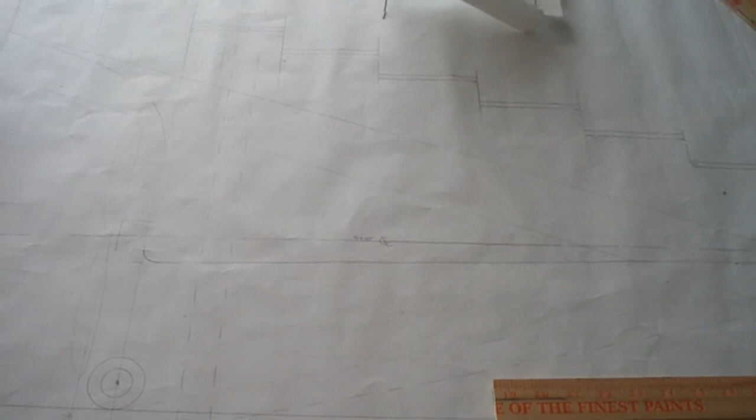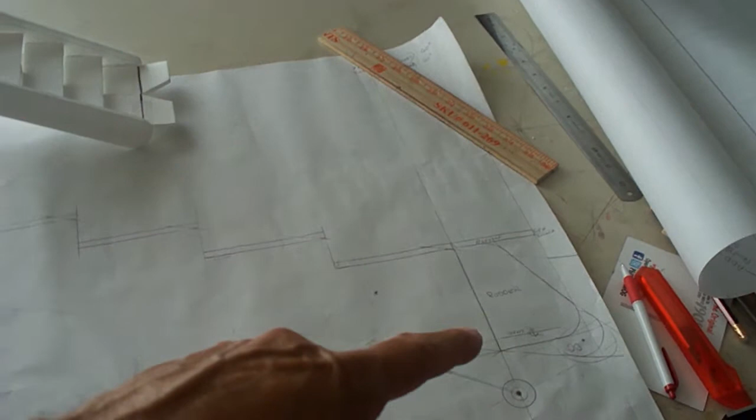Okay, I drew up a set of plans. I don't know if you can see this in the video or not, but here's the top. It comes down and around, down, and then I've got my landing gear, and it goes all the way back. I've got a rudder on it. Might be able to see that. And then I've got the cutouts for the slats all the way to the top. And like I say, it's about 32 inches across. My wing, I figured, is going to be 24 to 30 inches.

Alrighty, now for this little guy, got the plans all drawn up for the size and shape that I want. I've got my foam board. These are only samples. I got my foam board with paper on the side, paper on the side. I've got 1/2 inch foam, and I peeled the paper on one side. And what I did on this blue color that sticks, it's Artec. On the blue that sticks, I just took some clear tape or color tape, laid it on there and peeled it back, laid it on there, peeled it back, and I pulled all this up because it is a plastic, and I didn't want my glue or my bonding area to be interfered with that.

So I've taken and did a rough cut for my pattern, and this is for the fuselage. A rough cut, or just basically a plank, a blank, and then I've taken and put the Gorilla Glue on here. I scraped it on. I've put my foam board in there, and I sandwiched it. Plastic taken off, plastic left on this side. Bonded those two together. I put some weights on it. I used a piece of particle board and weighted it down with fuel cans.

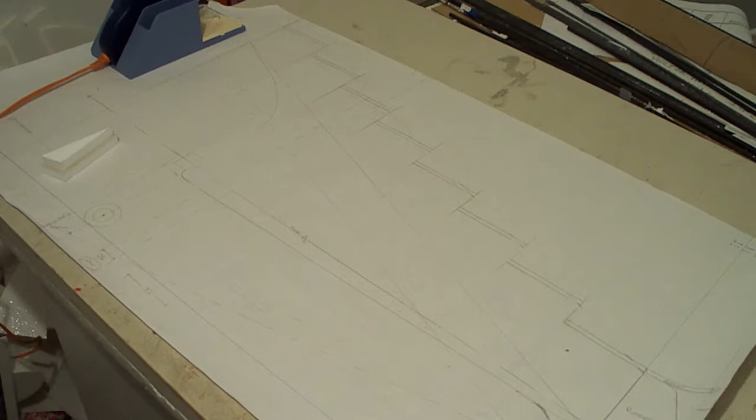On the other side, like I say, it's sandwiched. Dollar Tree foam board. I had to join a piece together here with hot glue before I put it together. So I've got these laminated with Gorilla Glue. Looks pretty straight. I used particle board on top. Simulate that as particle board, and I put my fuel cans on top of it. What I did was I traced out my pattern, the fuselage with the cutouts. And this is what I ended up with. Just a cutout pattern, basically.

Alright, and then the parts that I laminated, poster board in the middle, 1/2 inch foam on the outside, Artec, with my pattern, laid it out, stuck it down with some of this blue tape, painter's tape, and then I took a marker right around the edges here, kind of traced it out, cut it out. This is what I've come up with.

It's all cut out, and I've got the plastic here on the surface. I'm going to peel that off. Now, for anybody who plans or thinks that they're going to follow my pattern, just a word of caution: if you intend this thing to last, you've got to do something a little different. On the lamination, I'm going to peel back one of the laminations.

Here's the 1/2 inch poster board in the middle. The glue sticks to the paper great. That's the Gorilla Glue. But it does peel back off of the poster board. So you've got to make sure that you use another source, another way of gluing it together. Hot glue, I think, is too hot. At least my hot glue is. So just something to think about. If it's going to last for a long time, you've got to try something else.

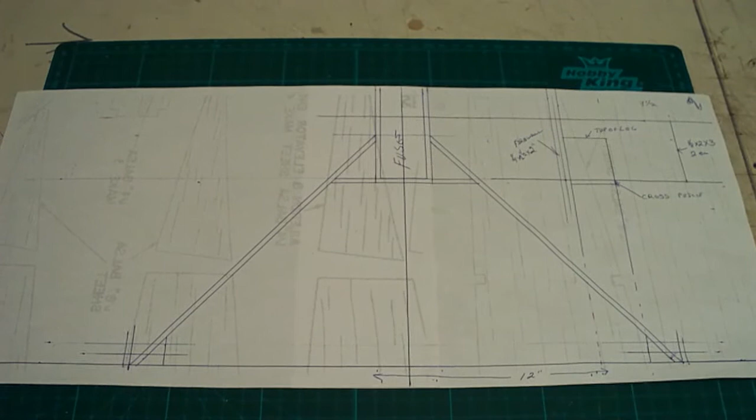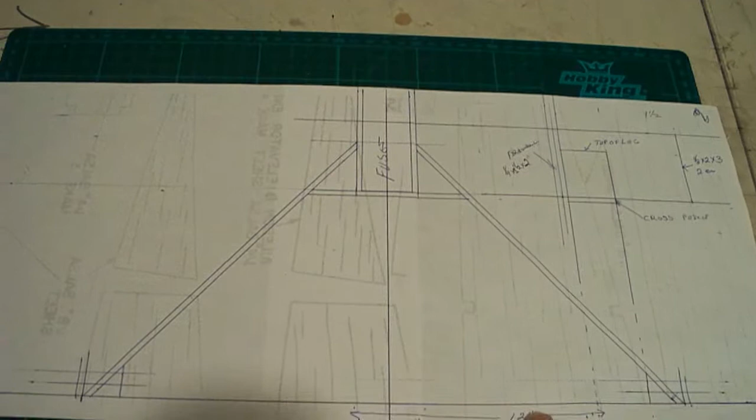Alright, landing gear. I decided to go ahead and build it up out of stir sticks from Home Depot or Lowe's, either one. And I did a little drawing here so that I could give myself something to work with. Here's the stir sticks, here's stir stick, here's stir stick, and I'll show you the little blocks that I made on the bottom to give myself some 90-degree flats.

And I simulated the foam center section here, and then I put plywood sidewalls on it to give it some strength. And the landing gear looks like, what do I do with it? I lost my landing gear.

Alright, here's the end result of the landing gear. The stir sticks from Lowe's, Home Depot. This is a piece of a yardstick here. And then on the sidewalls here, I've got 1/8 ply. And I simulated the fuselage here so that I can take this dummy piece out and then slide it up into the fuselage.

And my landing gear is wiffle balls, I think is what they're called. This is about a 1/4-inch dowel, and as you can see, the wiffle balls work great for spinning for wheels. I'm just going to put a block on the end and glue it.

And if you can see really good here, what I did to make my landing gear leg blocks, it's just two triangle pieces of hardwood sandwiched in there, squared up, and then I drilled right through them in the center, just like so. And that's what it looks like front where my fingers here. That's the firewall, actually. Firewall right here. And maybe a little overkill, but I figured I'd try something different.

So now we got to mount the darn thing. Here's a shot of the landing gear. I just have it pressed on. It's a real tight fit on the fuselage. Got the wiffle balls for wheels. Here's a side view.

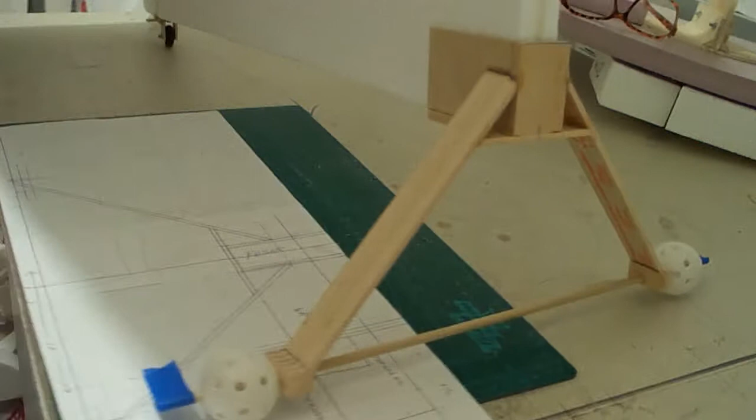And we'll give an overall view. Tail wheel, landing gear, the wing, the fuselage. Got to start mounting the motor and hooking up the servos.

I mounted the servos. I put some wood plates so that I could use the servos on something else rather than glue them on. And let's see. There's the elevator on one side. That's the rudder. Got the landing gear all set up. Got the battery mounted on the bottom with Velcro and rubber band. 2 screws on each side and anchored with the rubber bands.

And on the back here, since the wires are so long, I went ahead and made some anchors. And what they are is just some 1/8 ply, 1 inch wide, inch to half inch depending on how much they have to stick out, and then 3/8 embedded into the foam. And then I used some stiff heat shrink tubing, and then I covered them with, I didn't glue them on, I just used white packing tape. I wrapped the wood first, and then wrapped it one more time with the tube so it would hold it on, and it works pretty good.